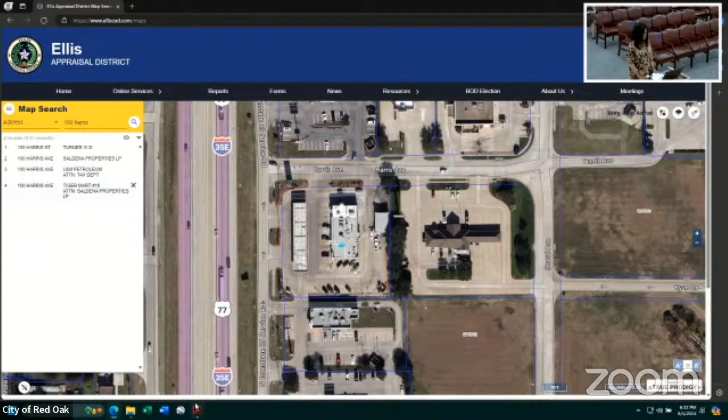Staff, please. Good evening, Commissioners. This property is addressed as 100 Harris Avenue. As you can see on your screen, it's right off of I-35, a gas station. Texas Department of Transportation has taken right-of-way in the red shaded parts.

They've removed the pole sign, but they're going to relocate it to another area. This was already a straight zoning district and was built and constructed prior to the adoption of our current zoning ordinance, so the sign was already closer than allowed to the property line. It's meant to have a setback of 25 feet, considering its size, but they're requesting to relocate it to an area about 5 feet and 4 inches from the property line.

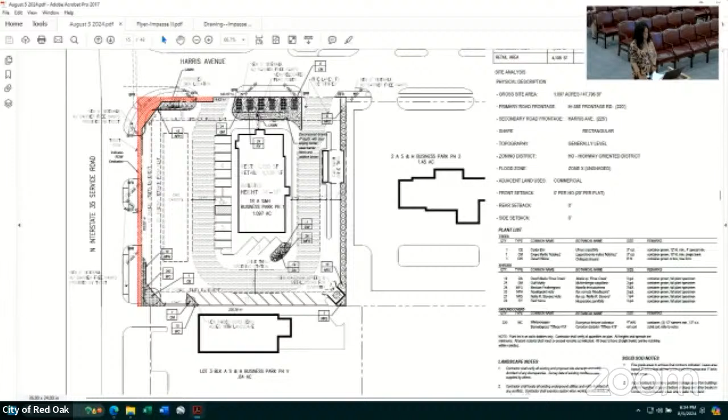The site will also be losing landscaping due to the right-of-way taking, so the applicant will be replanting landscaping within the site in different areas. I should take you to the landscape plan—they'll be planting in different areas within the site and along the right-of-ways, both trees and shrubberies. Although it won't meet the minimum landscaping requirements, they're coming as close as possible given the site constraints.

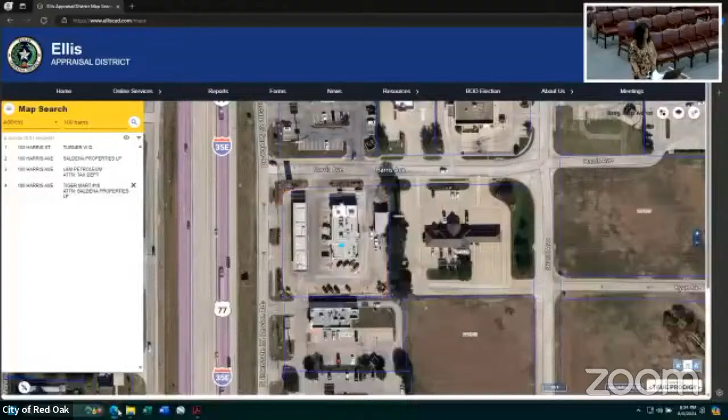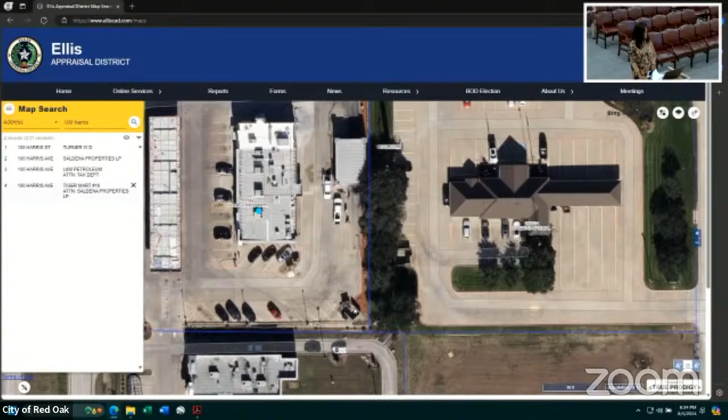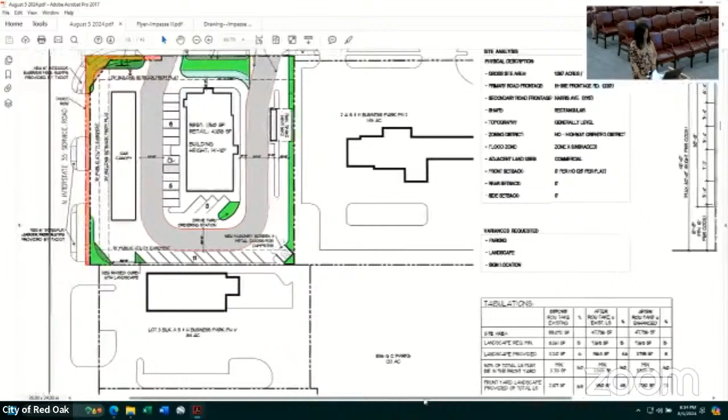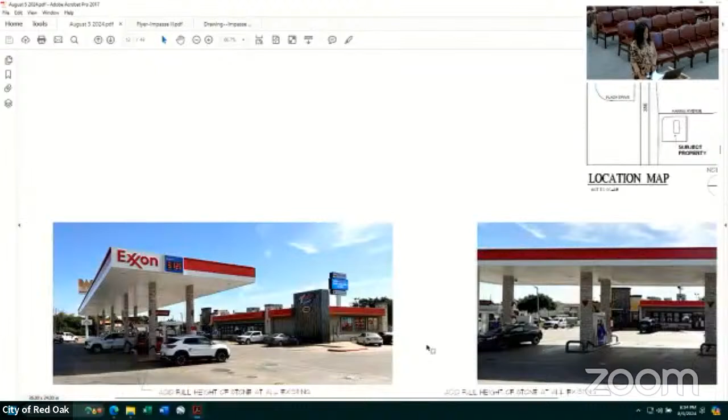They will also be restriping the fire lane within the site and adding other improvements, such as a masonry screening wall around the dumpster and metal doors. They are also proposing to brick up the columns of the monument sign, and add masonry and stone masonry to the canopy columns.

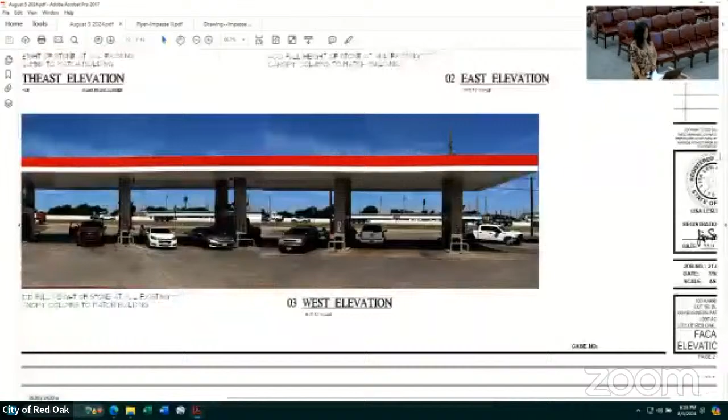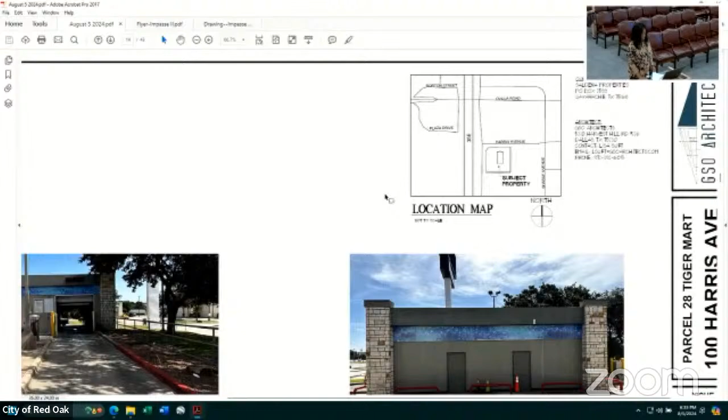To improve the site—the site didn't have enough parking to begin with. The TxDOT right-of-way taking won't affect the parking, but the parking would also be covered as part of this PD to allow the parking as is. They're required to have 40 spaces per current parking requirements, but they have 25 parking spaces, so that would also be covered in this PD.

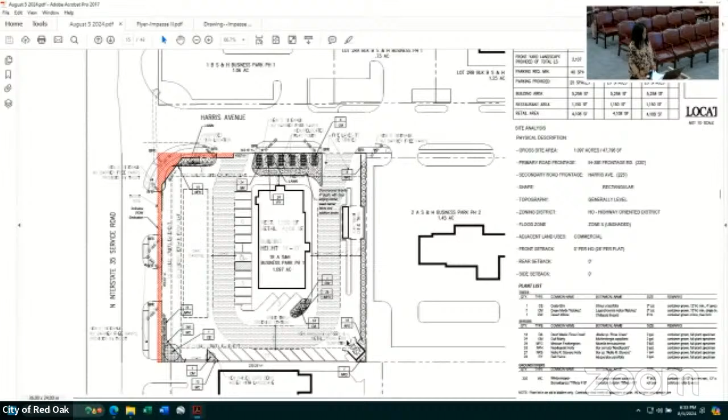So it's the signage—they'll also be relocating the flag poles that were on this corner, which have to be relocated due to the right-of-way taking. So it's the signage, the poles, the landscaping, and the parking, plus other site improvements such as dumpster screening, metal doors, and restriping.

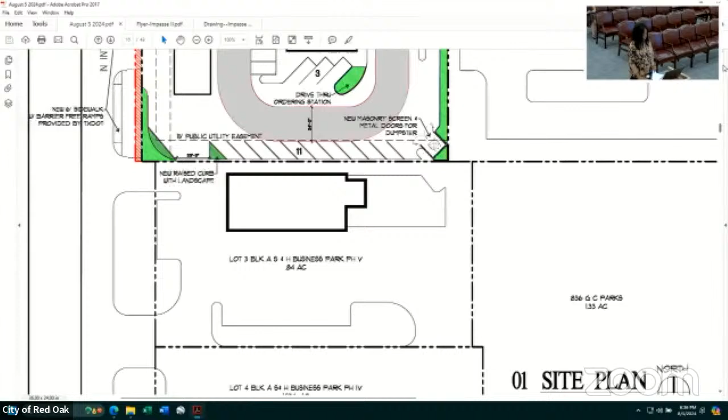The parking requirement is so intense because the end cap has a little restaurant—is it Church's Chicken? Yeah. And even though it's mostly drive-through business, we still have to count the parking spaces at 1 per 75, which makes the requirement so high. It's obviously been in use and functioning fine, so there shouldn't be a real concern that there's not enough parking on the site.

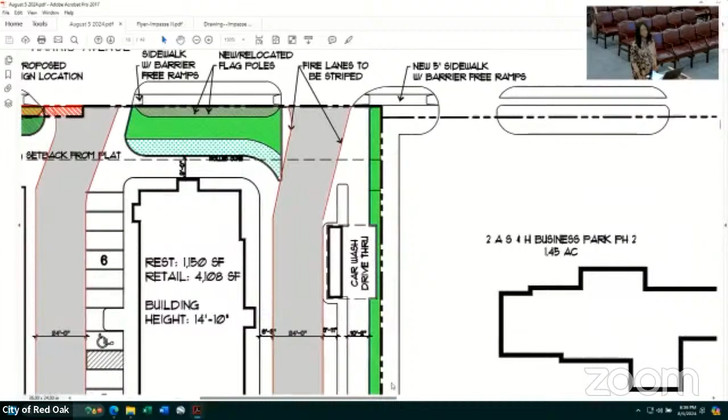Staff recommends approval. The comprehensive plan does support convenience store with gas pumps. We are here for any questions.

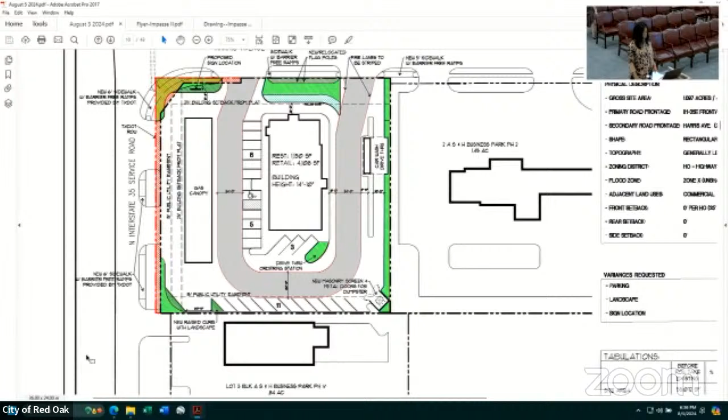Okay, thank you. This is a public hearing. Those in favor of this item, you can go first—please state your name and your address. Those who may be against this agenda item or have any questions, you can go second. The floor is now open.

Lisa Swift with GSO Architects, 5310 Harvest Hill Road, Dallas. I'm the applicant working for the owners, and I'm here to answer any questions. We respectfully ask your approval tonight. Okay, thank you.

Anyone else? If not, can I have a motion to close the public hearing, please? So move. All in favor? Second, all in favor? Aye. Ayes have it. Public hearing has been closed.

Commissioners, any questions or concerns? Question about the pole sign. You say it's gonna be moved. Is it the same design, the same type of sign that's out there gonna be there?

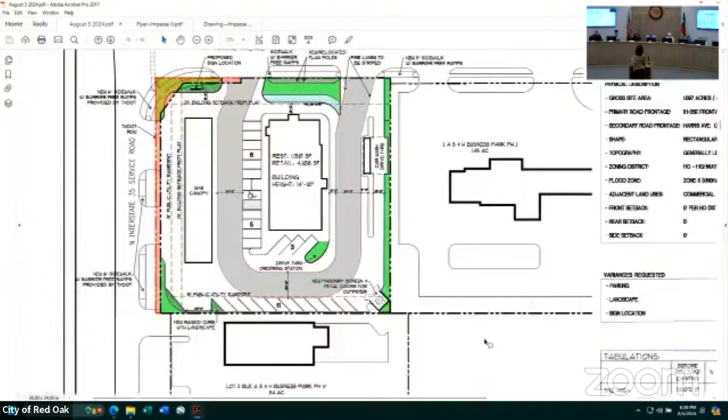Right. Do we have any pictures of that? I'm just wondering how big the base is. Is it gonna obstruct the view of people coming up, turning at that stop sign and making the right turn? I think you can go to the street view where you can see the old sign. Oh yeah, and then this is what they're proposing on the new screen.

Okay, so it's open on the bottom, where the columns are? Yeah, so it's 10 feet from the bottom up. And it looks like it's set well back from frontage. 5 feet and 4 inches.

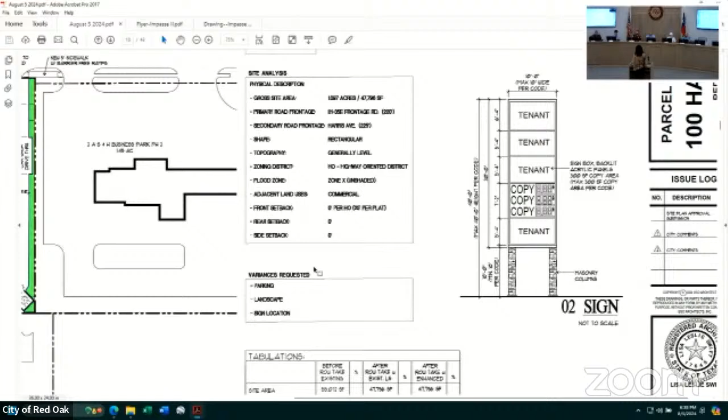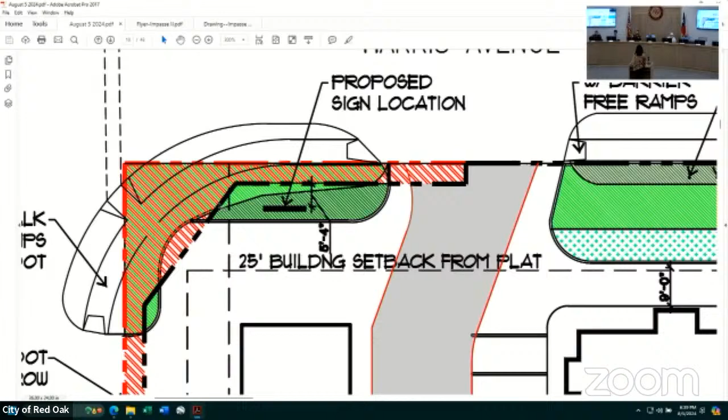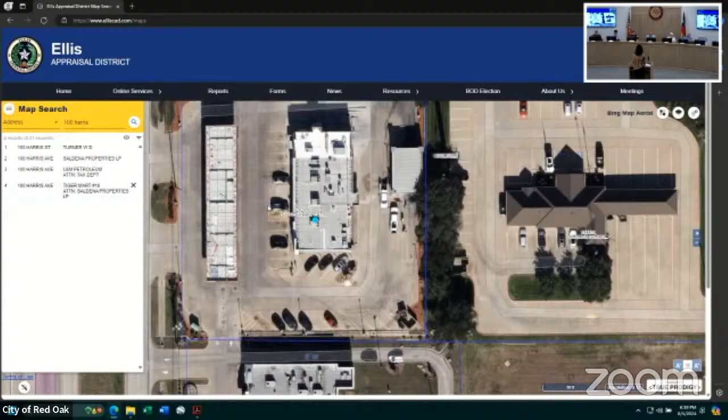And aren't all the properties gonna have to do effectively the same thing with TxDOT? Yeah, if they want to come in and pull any permits, they're going to have to do that. But if they're not needing to pull permits or get a new CO, they could technically just stay like that. But this property would have to get a new sign permit for this.

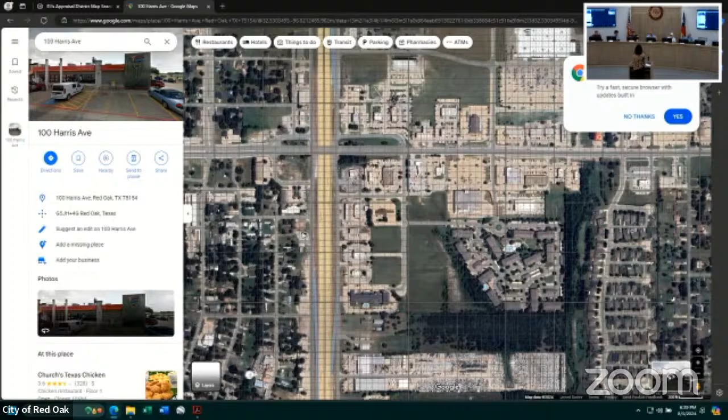Yeah, the way the ordinance is written, you can just keep doing what you're doing. The problem becomes when someone comes in for a new CO, or they sell the land and that person comes in for a new CO. We have to check all the things required for COs, and part of that is checking landscaping and parking, and that's how we get into a lot of these where we're having to change the zoning.

Understood. Okay, thank you. Any more questions? If not, can I have a motion for agenda item 2, please?

I move to approve agenda item 2 as presented. Second. All in favor? Aye. Ayes have it. Agenda item 2 has been approved.

Agenda item 3 will be postponed to the next meeting. Commissioners, real quick, on agenda item 3, we did not receive all of the information we had requested from the applicant for the meeting and for the packet. So we all agreed with them that the postponement of the hearing would be until the September meeting, which we'll go ahead and renotice all the property owners so that they're aware the change has taken place. Ben, do you need a motion on that or is it?

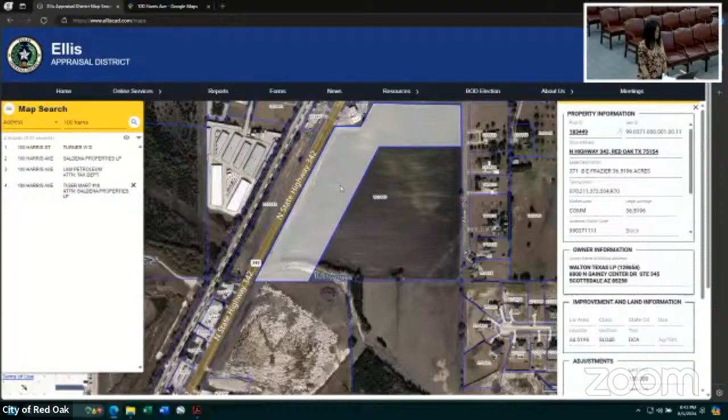Staff, please. Commissioners, this is a request for conceptual submittal for a data hall complex center. This property is located on the southeast corner of 342 and Ovilla Road, behind this gas station. It composes of this site, and a portion, just a portion of this side, which I'll show here.

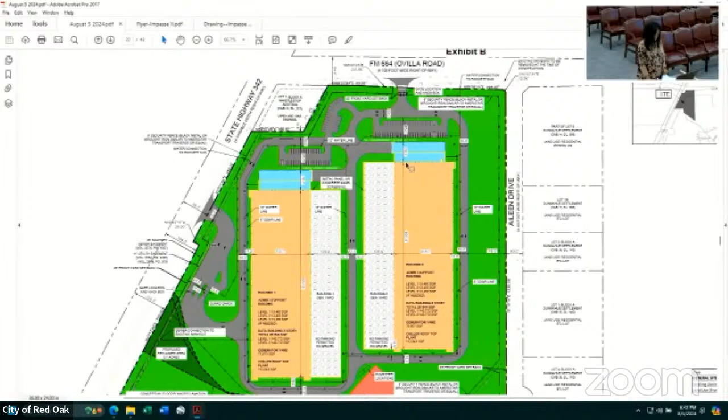Access to the site will be from 342 and Ovilla Road, and both access points will be gated. As mentioned earlier, they are proposing 2 data hall buildings, and each will have to meet its parking requirements, and each has a generator equipment yard, which will be screened from right of way.

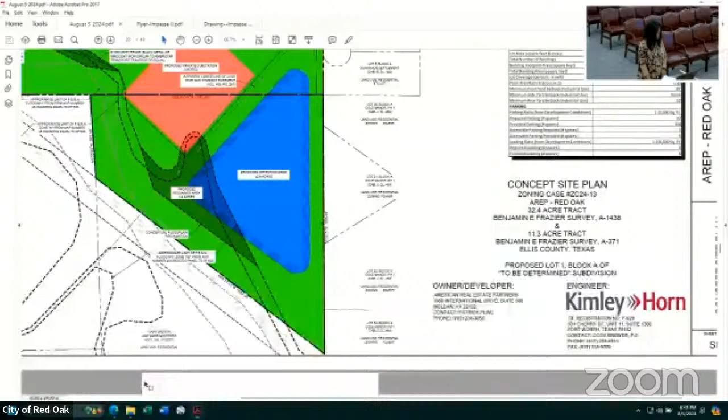So the site consists of part of this portion of the south tract here, as you can see. The site will have 8-foot wrought iron security fencing as shown on the plan, as you can see here.

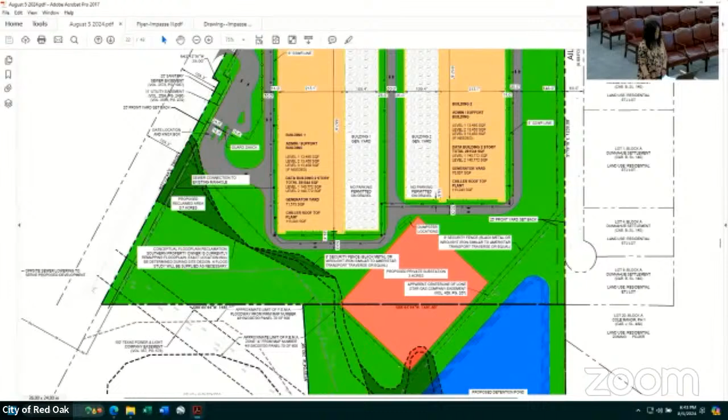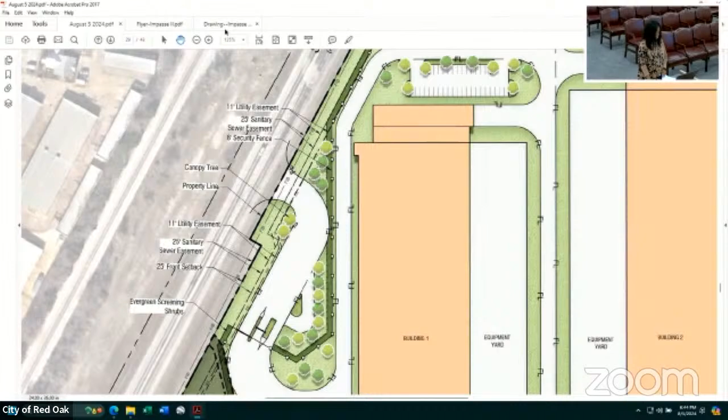And it will also have evergreens screening along certain sides of the development. It's here, goes throughout this site. Evergreen screening is an opaque type of screening. They're typically green all throughout the year.

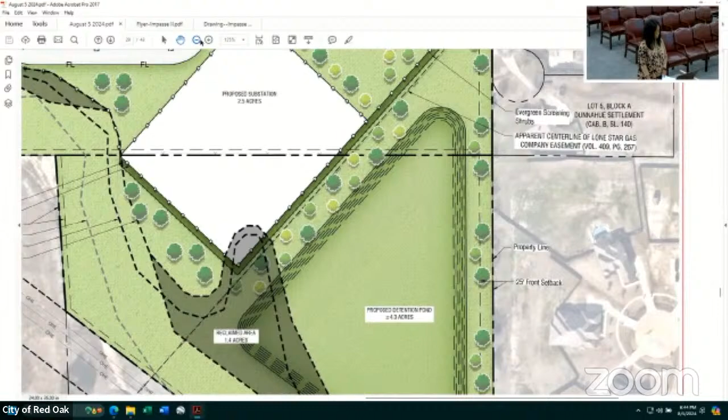And as you can see, these are the equipment yards. The applicant also submitted elevations showing the proposed screening, and this is conceptual, just so that we can get the idea of how the site will appear.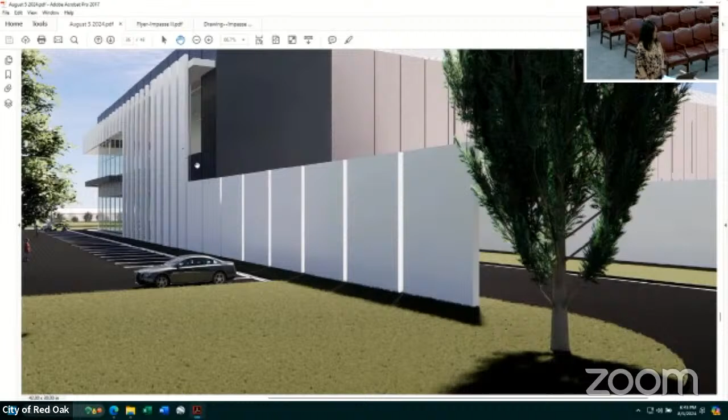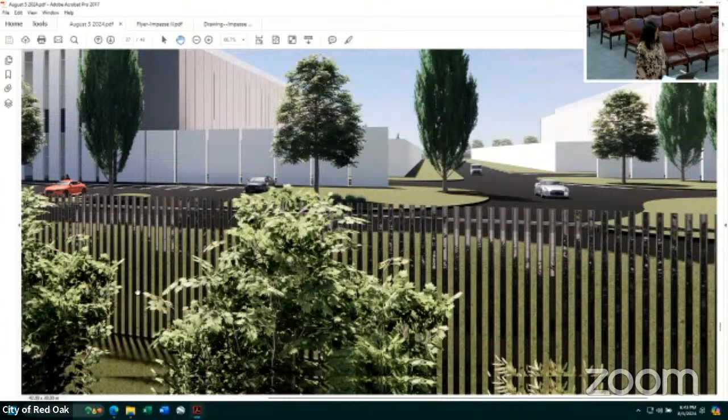The buildings will be required to be 100% masonry with the option of using concrete, tilt-up, precast panel walls. As you can see, here's the screening, with the option of using the decorative, architectural, metal material at the front. Here are the generator yards, here's the screening, and this is the 8-foot wrought iron security fencing.

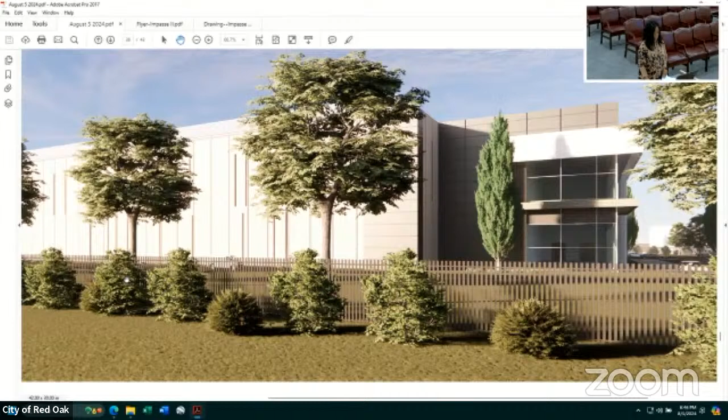The site will be required to meet the city's minimum landscaping requirements with the exception of certain conditions, such as the front yard landscaping requirements. But we do have requirements, for example, one tree planted every 40 feet, one 3-inch caliper tree. When they do come back to submit their detailed plan, they'll have to submit the landscape plan, which will include all of the landscape tabulations, information about the species of the trees, and the spacing. This would be representative of the evergreen screening.

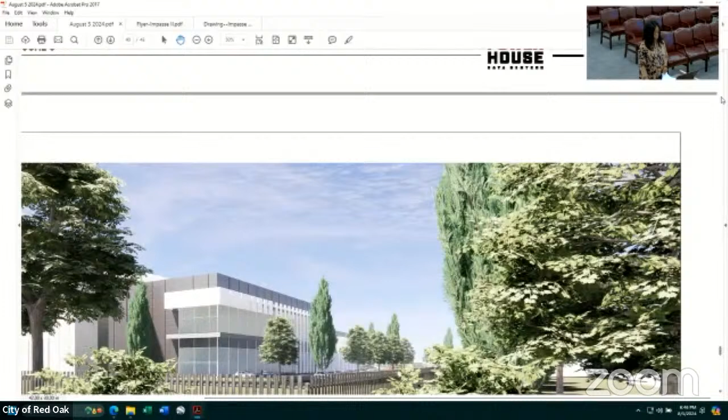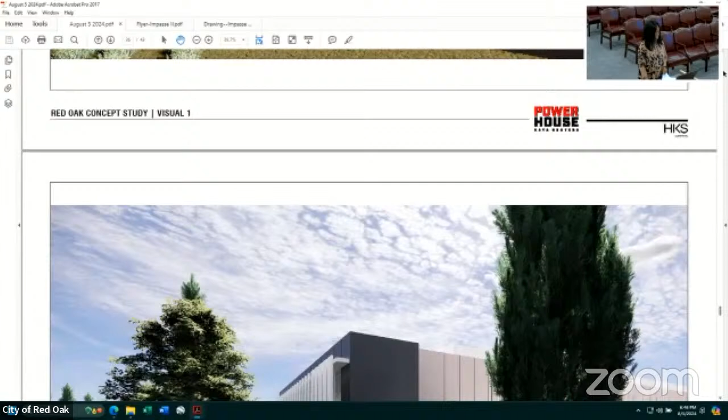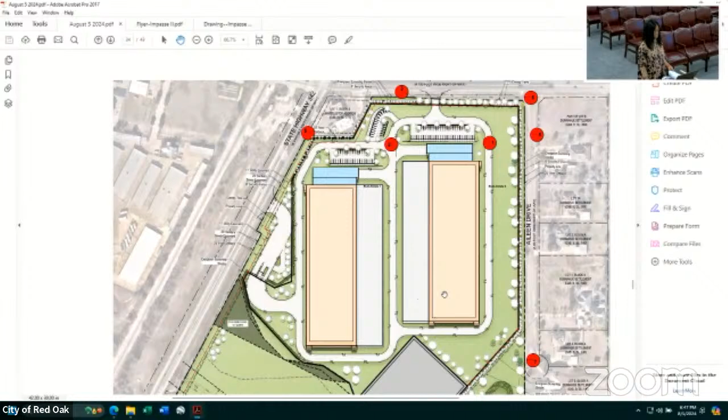Go back to the site plan, I was going to add a couple things. So the maximum allowed DBA from the property line will be 65. Other data centers in the city, it's at 70, but we requested a lower DBA because this one has a greater proximity to the residential subdivision to the east of it. The noise would typically occur, for example, if emergency generators were to turn on, or during construction on the site if this is approved, and at that point they're able to exceed that DBA.

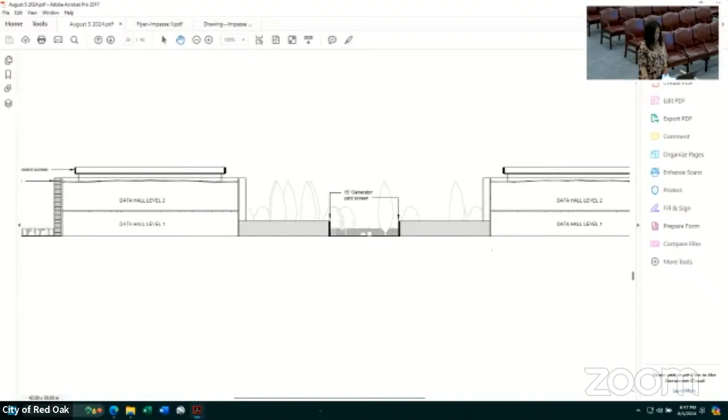Yard section, the screening, 15 feet. And all generators will be required to have some sort of sound attenuation device to reduce the amount of noise that it produces, and those are just emergency generators. Correct. If the power goes out, they're not the type that's powering the building, except for an emergency situation.

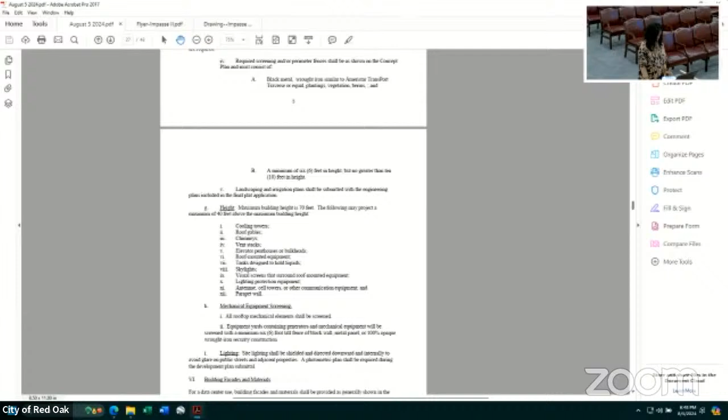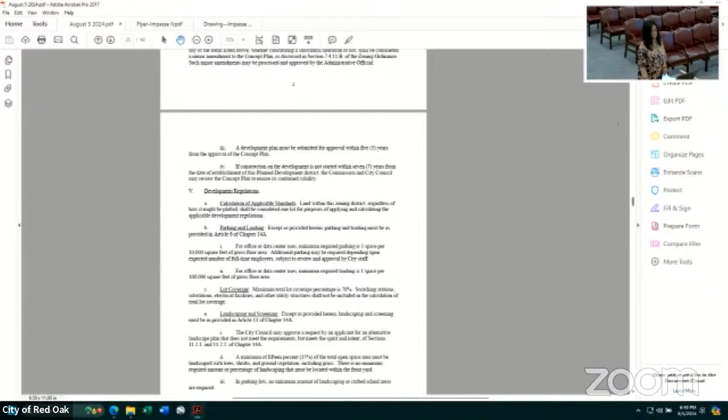They did submit this PD development standards, so when they do come back to submit for the development standards, they'll be required to meet all of these requirements. That's going to have to be accompanied with the elevation plan, the site plan, and the landscape plan. They're also going to be required to submit a photometric study to ensure that all of the lighting is pointing downwards and doesn't bleed over or illuminate onto the adjacent properties.

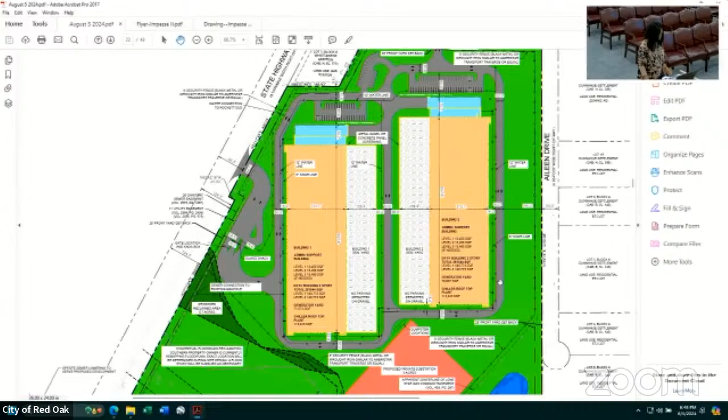So the kind of big concerns that we had with the developer when we first started talking, and it was their concern too, was the folks on Aileen here. They're not in the city, but we still didn't want to have connections to Aileen, so that's why all the connection points are on the state roads, as well as trying to push the buildings as far as possible from Aileen.

So you can kind of see there's a 146 to the right of way, and then the right of way is an additional 60 feet to their property lines, which then is another 25 feet to the front of their house. So there's quite a bit of buffer between there, and that will all be landscaped and securely fenced off.

So the next part was, well, when you do got to run the generators, they're going to be loud. Let's face them interior so that when they do have noise, it's interior facing and you're getting blocked by the buildings.

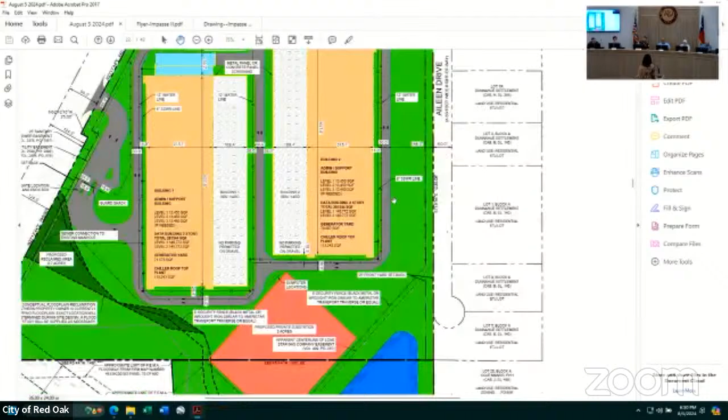One of the first concepts we saw had this red square, which is an on-site substation for their power consumption. In the first renderings, the red square was where the blue triangle is. We asked if they could alter that so we could get the substation as far away as possible from the lots, and they complied. They thought that was a good idea as long as they could fit it in, and they were able to.

We were trying to get everything to be as far away as possible from the existing homes. But that's all I had. So any questions we can answer as well.

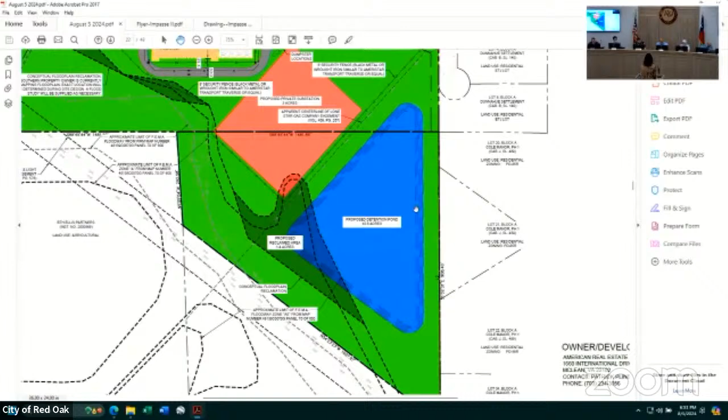The detention pond falls basically into the city, into Cole Manor, and goes into the creek back there. Its purpose is just to hold water until it runs off, to detain the water between the existing condition flow, which is a big field, so it's not as much, to a developed condition, which is a lot of paving and rooftop. So it detains that difference.

So this is a public hearing. Those in favor of this item can go first. Please state your name and your address, and those who may be against this item can go second, or if you have any questions.

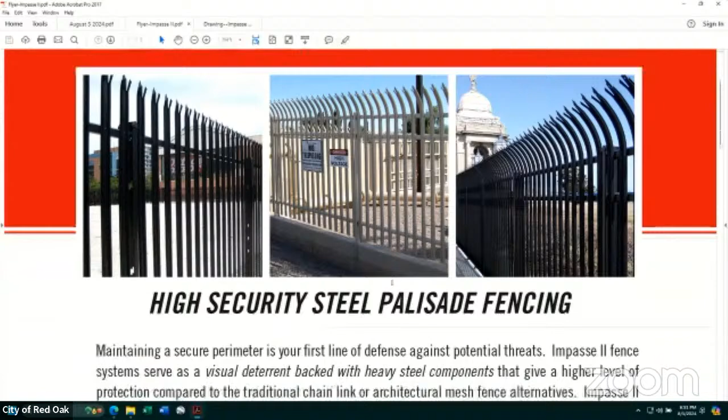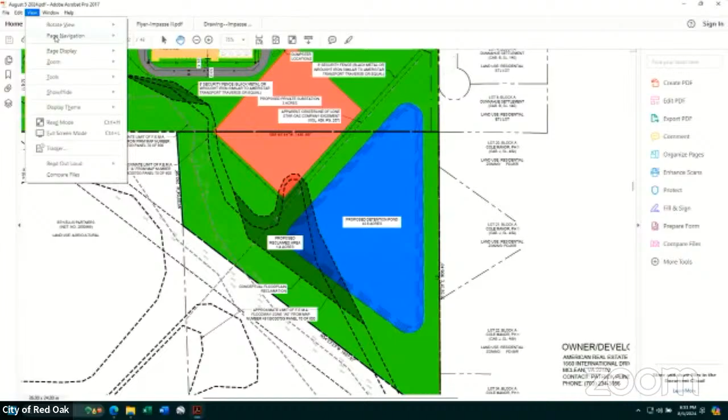And this is the fencing. I can figure out how to... If I do that, is that better?

Yes, that's fine. Tommy Mann, 500 Winstead Building in Dallas. I represent AREP, the data center developer that has this site under contract. Staff's done a good job, so I'll try not to be repetitive, but their comments are reflective of the collaboration that has led to this concept before you tonight, driven by being sensitive to the residential adjacencies.

The only thing I'd add to what they pointed out: south of this point here is actually outside the city. We've petitioned for that to be annexed into the city limits and zoned and considered by you all on the city council. There are significant improvements to the intersection planned by TxDOT. The access points we show here, we've got conceptual approval from TxDOT already, and we've designed the site to account for those future decel lanes and intersection improvements.

You're pretty familiar with the data center land use in Red Oak at this point. As you know, once it's up and running, the traffic generation and all those sorts of things are very low, but obviously you have to construct the project, so a lot of attention is paid to how that happens during construction.

The good news on this site is all of our access is off the TxDOT highway, and even during construction this will be the main access point. Aileen won't be used at all during construction, and really won't be used at all even once it's up and running. Everything else staff pointed out, we've moved the service areas central so the buildings themselves will provide attenuation. The distance at the closest point from a building to a residential lot line is about 250 feet.

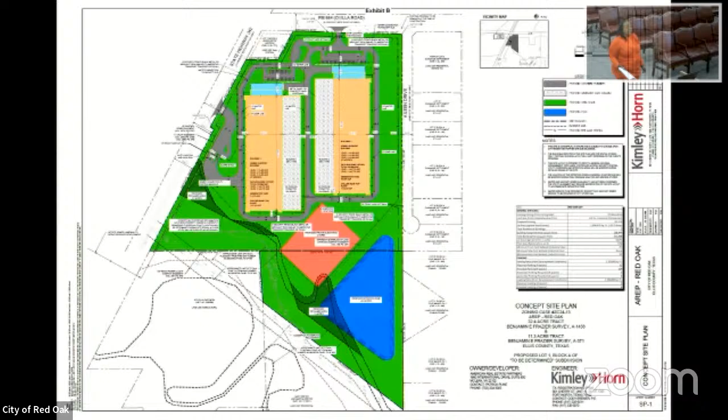Hi, my name is Tina Chaney. I'm at 230 Castle Creek. I am in back of that particular facility.

Right now I'm concerned because when it rains, I have a big open area where the water collects, and sometimes it comes over my fence. With the new construction, I know you have the retaining structure, but would it cause more water to come into my yard since my yard already floods? It takes a while for it to drain back into the creek.

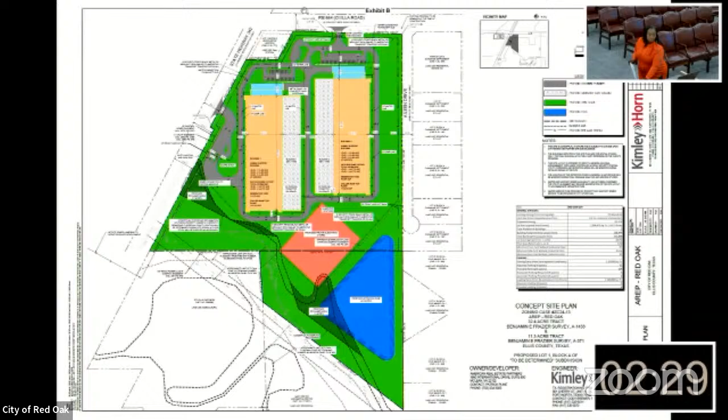Can you bring the picture up? To the area, the very point where the triangle is. Are you the one that lives on the 10 acres? Yes. Okay, so your backyard is supposed to flood?

Yeah, I mean, no, but we've talked about it before, right? Yeah, but it's coming up over the 6 foot fence sometimes. I'm concerned - when I purchased, they told me it was going to drain and not go that high.

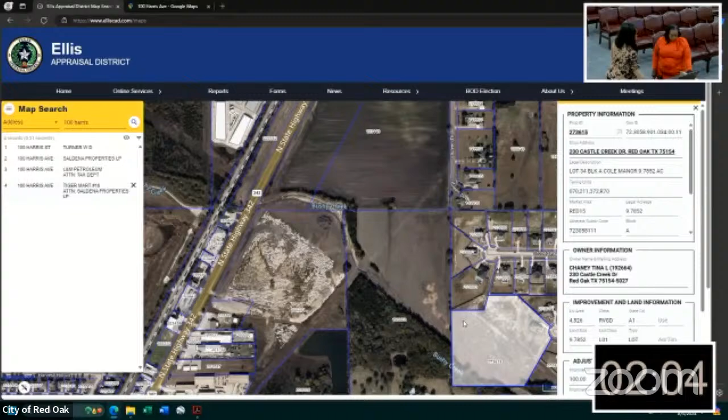I'm concerned about the new construction - will that cause more flooding? I think it's this one. This one? Is that it? Yes, you know Shane, that's it.

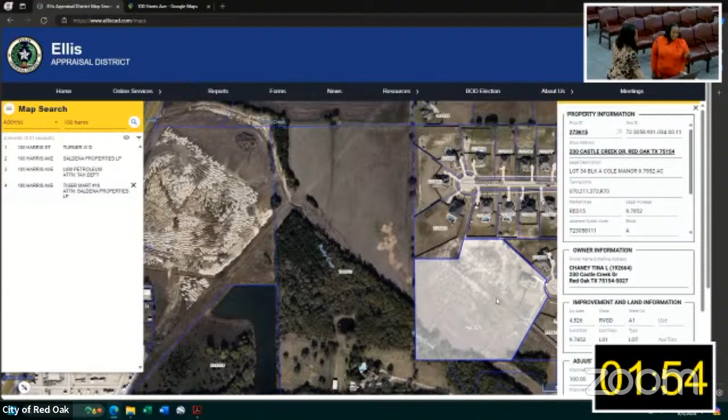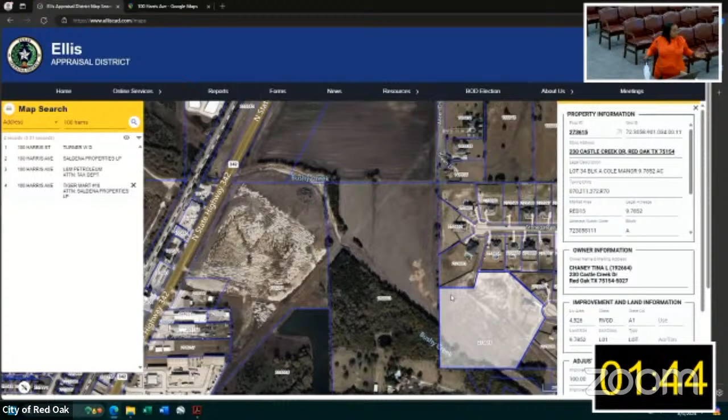I'm concerned that right now, I put in a request with First Texas for additional drainage, because when it really rains, it's like I'm on an island. The water gets over my 6 foot fence, and I'm concerned this will cause damage.

Also, will the construction cause any pollution? I know there's a retaining structure there, and I'm okay with it, but I want to make sure about construction pollution, the generators - we're used to the train, so we don't care about that.

My biggest concern is flooding my house. Right now with heavy rains, it's 6 feet and I'm on an island, and it takes a while to drain into the retaining pond and then the creek. With the new construction, I'm very concerned because First Texas still hasn't put additional drainage on my sides, and I don't want my house to flood.

Okay, understood, makes sense. So your lot has the detention pond for your entire neighborhood? Yes it does. And unfortunately you got stuck with it, the way the developer developed the subdivision.

Will it cause more water right now, since it goes to 6 feet? The point of the detention is that it would detain back to existing conditions, so it wouldn't have any more water running off than it already does.

But when they do their engineering plans, we're going to give them the engineering plans from your subdivision and make sure they tie into it, and do what is necessary to keep additional flooding from happening. That's part of our permitting process and part of their design process from the engineering side of things.

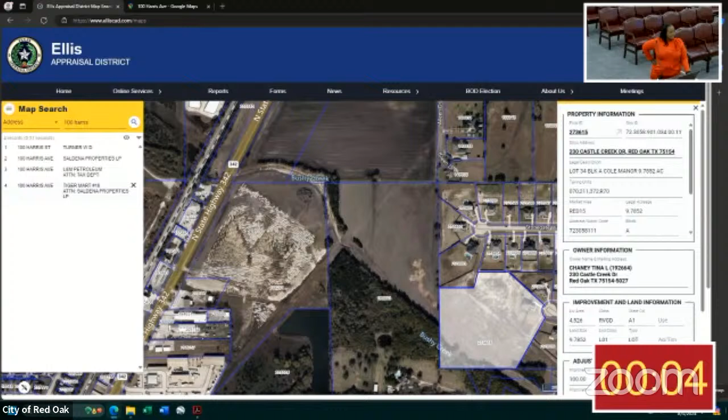So let me ask you this - if I have any concerns, do I just come to the city and speak with you all about that? Yes. And any damage, you all will fix it also?

We wouldn't do that. The developer would be responsible. If you believe the developer caused you damage, then you would have to seek damages from the developer.

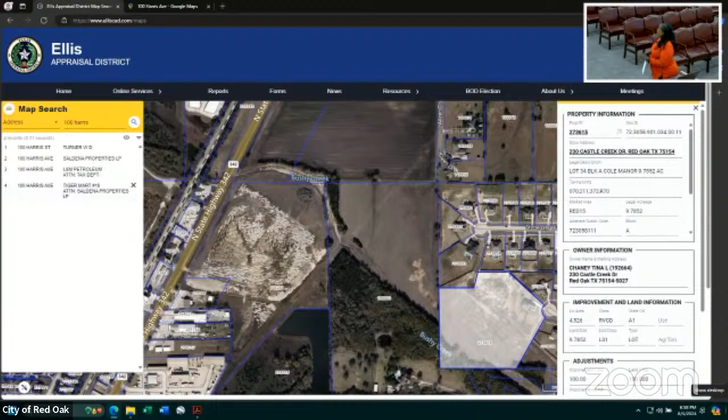Okay, so that would be information I can get from the developer. You would have no problems - if they cause damage, they will fix those damages. Okay, I appreciate it. Thank you.

I'm Patrick Klein with American Real Estate Partners and Powerhouse Data Centers. Really just here to answer any questions, and Kimley-Horn is with us, our civil designer. So questions like this, we'd be happy to address to the council if you want to go through it. Okay, thank you.

Anyone else? If not, can I have a motion to close the public hearing, please? Motion to close the public hearing. All in favor? Aye. Ayes have it. Public hearing has been closed.

Commissioners, do I have any questions regarding agenda item 4? My only question would be when anticipated construction would be. Is that a 5-year window? When would you anticipate starting? It should be less than 5 years.

The number one driver of it is going to be Oncor, who, when we initially got the site under control, had said that power would be available within 3 years, which would dovetail nicely with pre-development and construction. It may get extended. They've ordered an area study now, and we're waiting for them to tell us when they are comfortable that it will be there. But the plan is to proceed into pre-development and construction as soon as 2 to 3 years, unless Oncor pushes it out. The other thing I would say is that the two buildings, this is relatively small, so they would be constructed in one phase.

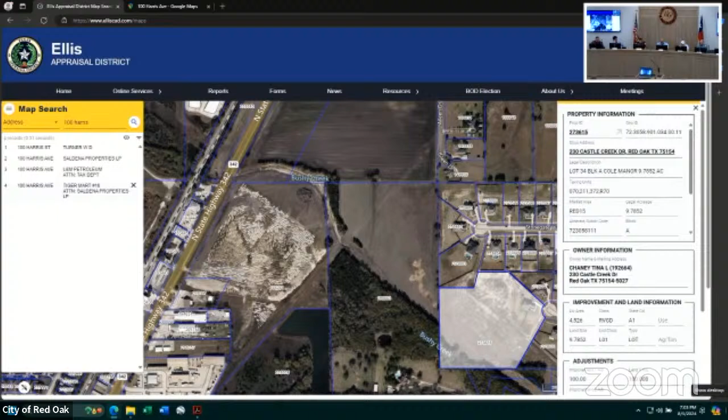I guess my question, and you talked about it, was in regards to the individual here tonight about flooding in her backyard. You were saying those two engineering reports will come together to make sure. Yes, so we'll have to give those to Kimley Horn, their designers. When they do the site, they're going to ask us for all the as-built around the area, and then they'll tie in theirs as well as this south property, this 188281. They're doing some work with FEMA right now to adjust this floodplain that's within the creek right now. Okay.

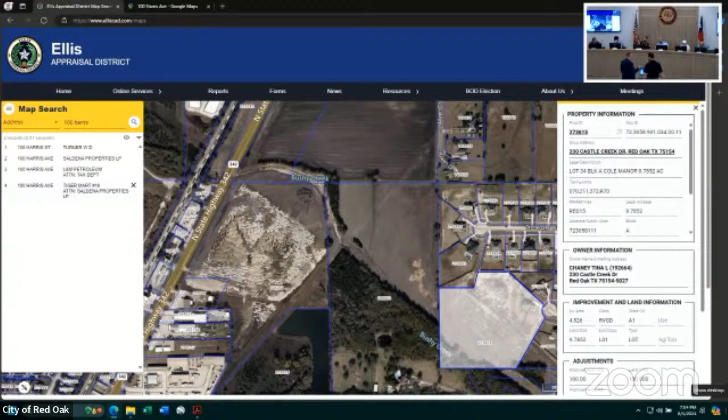So they may not address her current issue, but they won't make it worse. That's the intention, but I don't know that the drainage happening on her property right now was supposed to be doing that. It just looks a little scary because it's on her property instead of an HOA lot, which is what we require now. All detention ponds should be on an HOA lot.

Our civil engineer is here if you want him to take a shot at it, but before he does, I'll say my experience with this issue generally—I'm not sure when their subdivision was developed, but the standards have gotten much more strict. What often happens is when they provide us plans for their subdivision, they don't meet current standards, so it falls on us to get everything functioning up to current standards. We may end up detaining even slightly more, depending on what that looks like. Now if their subdivision was built two years ago, theoretically it would be up to current standards, but you can probably explain that better.

Yeah, the one point I was going to make is that with the zoning we're seeking at this time, even though the zoning goes through, the subdivision ordinance is still something we have to comply with, and that's the regulation we have to abide by as engineers.

As we're looking at the site, we have to look at the existing conditions—what's the flow coming off the property today—and we can't send additional flow downstream. We've got to do evaluations on the creek and verify we're not causing adverse impacts. That's why on the site plan you saw the detention pond. Its function is to hold back that water and release it at a slower rate to ensure it doesn't flood downstream. Happy to answer more technicalities, but that's the process we'd go through via the subdivision ordinance and permitting after zoning.